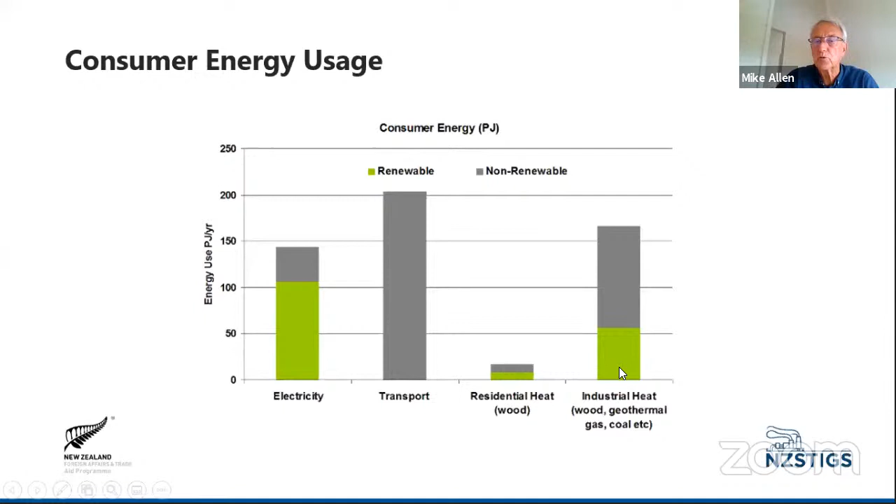Talking a little bit about New Zealand's electricity system, because that sets a picture as to how we choose sources. We're very small in terms of population, around 5 million people. The area of New Zealand is roughly the size of California in the United States. As many of you will know, it's 2 islands separated by the Cook Strait. The generation for New Zealand electricity is spread throughout the country. The predominant generation, by hydroelectricity, is in the south, and it's transmitted by a direct current overhead system and under Cook Strait into the North Island, because this is where the majority of population is. The largest population is in Auckland, the capital in Wellington. So there's an HVDC link between the 2 islands.

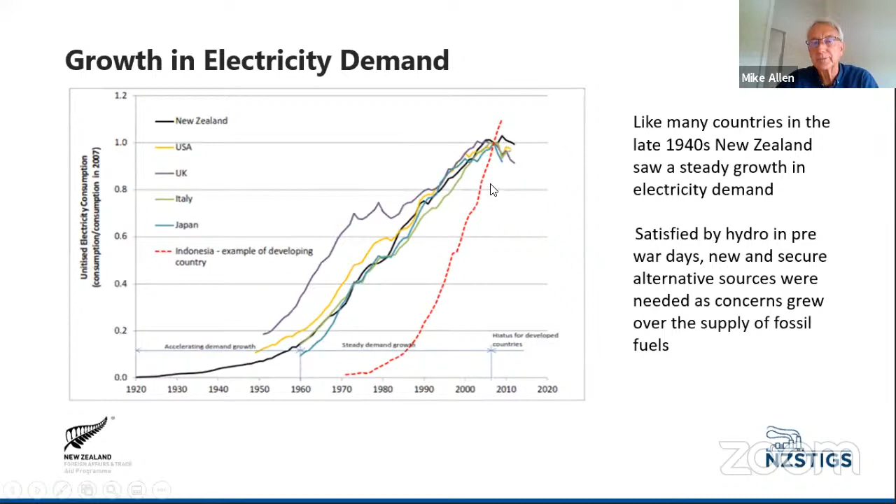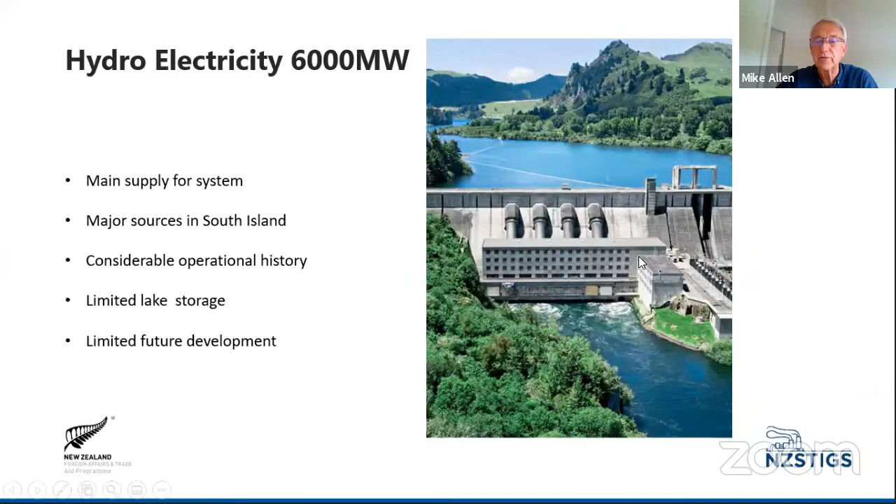New Zealand has a mix of renewables, as I said. The predominant form of generation in New Zealand for electricity is hydroelectric power, so this uses water. In New Zealand, the systems are such that there's not a lot of storage for water. They're not run of river, but there's limited storage, only about 2 weeks capacity if we run out of rain or we run out of snowmelt. But we have a very long history of hydroelectricity being important for us, for over 100 years. The state's first project was built in the 1900s, and by the 1960s, there were major developments in the North Island, and then in the South Island we began to build more hydroelectric plants.

As with many countries, hydroelectricity is environmentally becoming less and less acceptable because it takes a large amount of land. Although there are plans for some small schemes in New Zealand, it's unlikely that we will have major hydroelectric developments in the future.

The one exception is that we are at the moment considering a pumped hydro storage project, where when we have excess renewable energy during the daytime, we could pump hydro and store water for later use. Geothermal, which we can talk about in more detail, is about 1,000 megawatts.

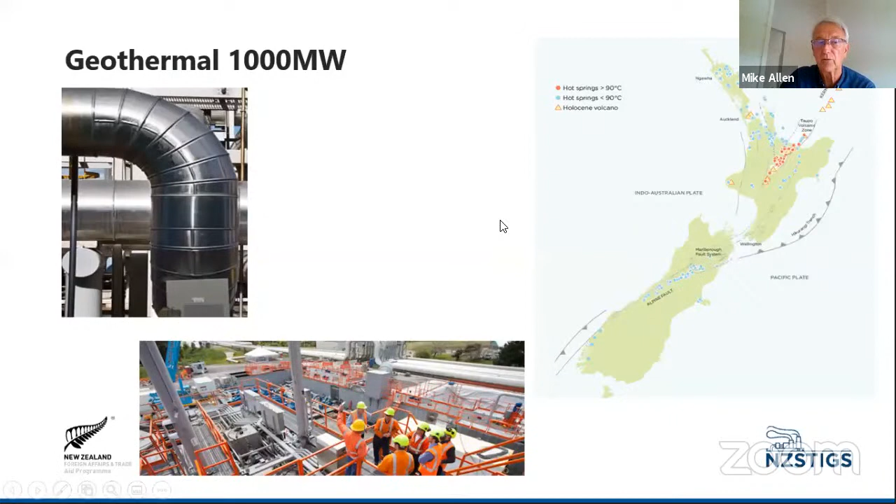So if you look at the history of geothermal in New Zealand, it's been slow and influenced by a number of things.

Post the Second World War in the 1940s, New Zealand as an island nation was looking for security of energy supply. We did not have our own oil and gas, so everything was imported.

It happened that a number of people who were involved in the Second World War from New Zealand saw what had been done in Italy, where the Italians had developed geothermal energy for their use. Having seen that, and being aware of the geothermal resources in New Zealand, they came back and encouraged the government to explore what could be done with geothermal in New Zealand.

So in the 1960s, the first development was in a place called Wairakei, these are Maori names. Wairakei has now been operating for over 60 years, and this was a state-owned development.

Then there were some smaller developments in 1966, but there was almost a hiatus in geothermal after that. What happened in these years was that New Zealand was exploring for oil and gas, and with foreign partners, we developed a very large natural gas resource off the North Island.

Being a small country, that was done on a take-or-pay basis, so whether we needed the gas or not, we had to pay for it. So the government was inclined to build natural gas power plants, and a lot of natural gas was consumed in these years for power generation.

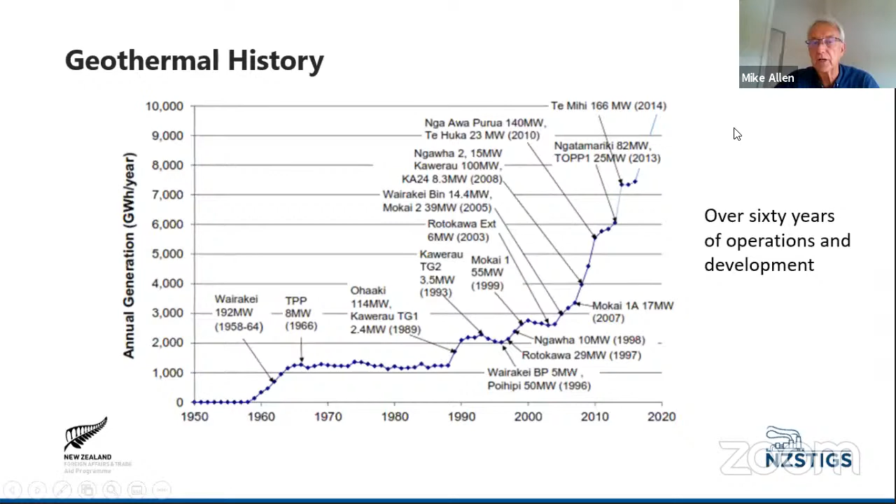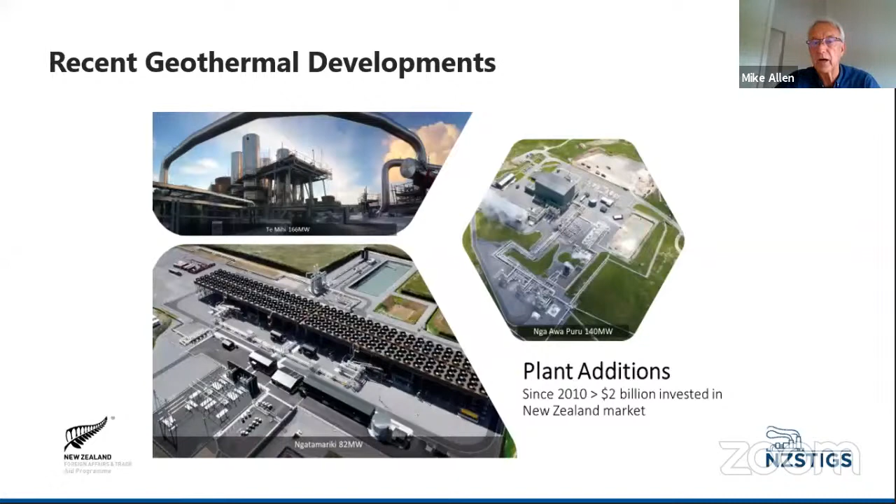In parallel, and I will come back in the Q&A to talk more about geothermal, we've also been looking at other renewable resources.

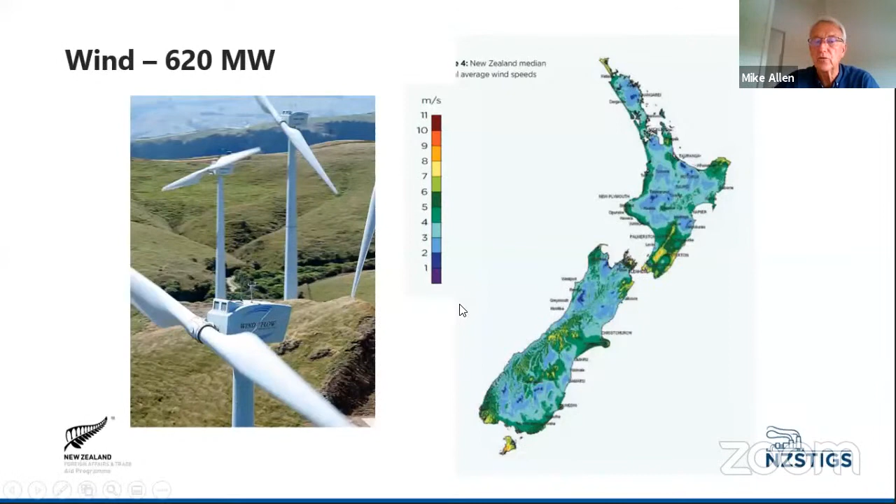As New Zealand sits in the roaring 40s, we have a very good wind resource in general—in the lower central part of the North Island, close to the Cook Strait, and in the south we have very good wind resources, and those are being progressively developed.

This is quite recent, and probably only in the last 10 or 15 years has wind become important to us. At the moment, it's generating about 6 or 7% of our electricity, and there are new plants being built—approximately 2,500 megawatts of new plants being developed in future.

This is a new one, Turitea, which is a nearly 300 megawatt plant in the southern part of the North Island.

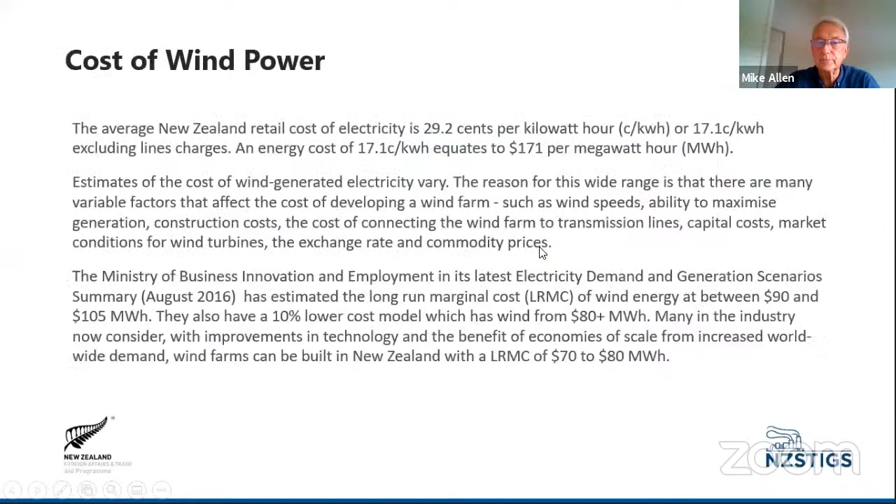Solar electricity for New Zealand is not particularly common. And that's been partly historic in that the hydroelectricity and the geothermal were cost competitive. And until recently, solar electricity has not been particularly cost competitive for grid connected power. So we've tended to stay away from it, but that's changing a little bit.

There are some large scale industrial installations, and this is as industries look at climate change, some of the corporate image, and also the fact that many buildings can be used for solar power without taking up valuable land. There is a growing interest from a residential point of view to use solar PV, but that is as much an opportunity for battery storage and playing in the market in terms of time of use.

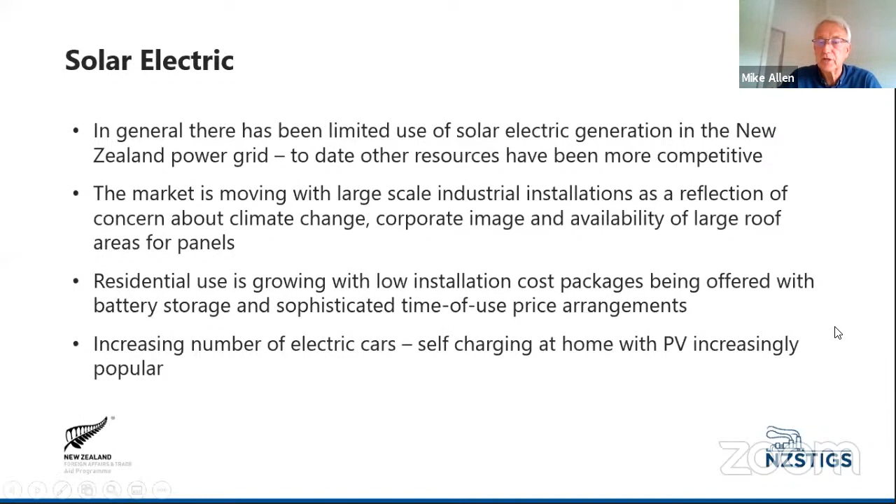So if you have a battery which you can charge with solar during the day, use it at night, you can charge at night and off-peak electricity rates, cheaper electricity if you have storage. So it's a combination of solar development and also more efficient use of electricity. And we are pushing quite hard to introduce electric cars in New Zealand, and that's creating an interest amongst residential owners to have solar PV at their home, which they can use for charging vehicles.

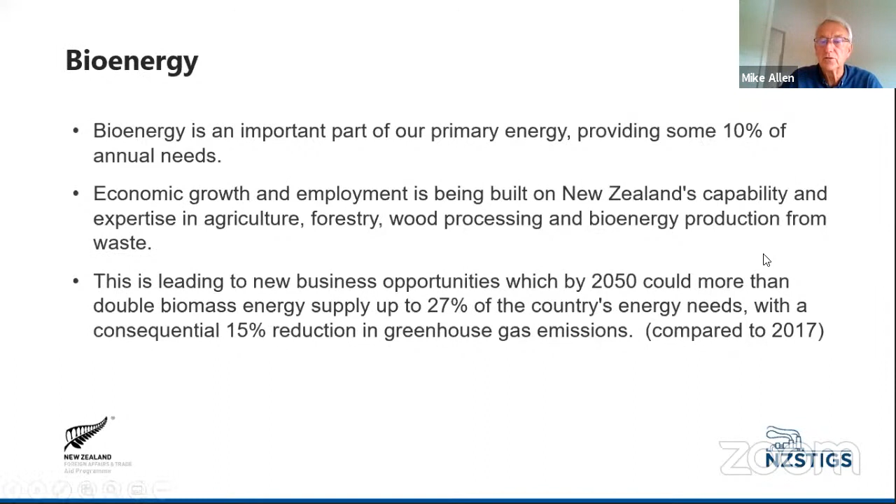Bioenergy in New Zealand is part of our primary energy. It gives us about 10% of our energy. And as we've been building our agriculture and forestry and wood processing work, we are looking at ways in which we can improve the use of bioenergy and the use of biofuels. There's obviously competition from other sources of energy in New Zealand, but there is quite a major effort amongst the bioenergy industry to try and promote better use of waste materials for energy going forward.

So just to give you a bit of an idea about the electricity market here, because in Indonesia with the structure with PLN, essentially you have a single off-taker. And so the generation of electricity is all retailed and marketed through PLN, and the arrangements from electricity producers are only with PLN. However, in New Zealand, we have a deregulated market, which means that anybody can generate energy from any form and can sell it into the market. And I'll explain a little bit more about how the market works in a minute.

But the three major companies, Mercury Energy, Genesis, and Meridian, are state-owned enterprises that I mentioned earlier. So they are 51% owned by the government and 49% are traded in the stock market. Contact Energy was 25% of the original state-owned power company, but it was fully privatized, and Trustpower is a more recent player in the market. So there's a spread amongst the four major generators, and then there are smaller generators as well.

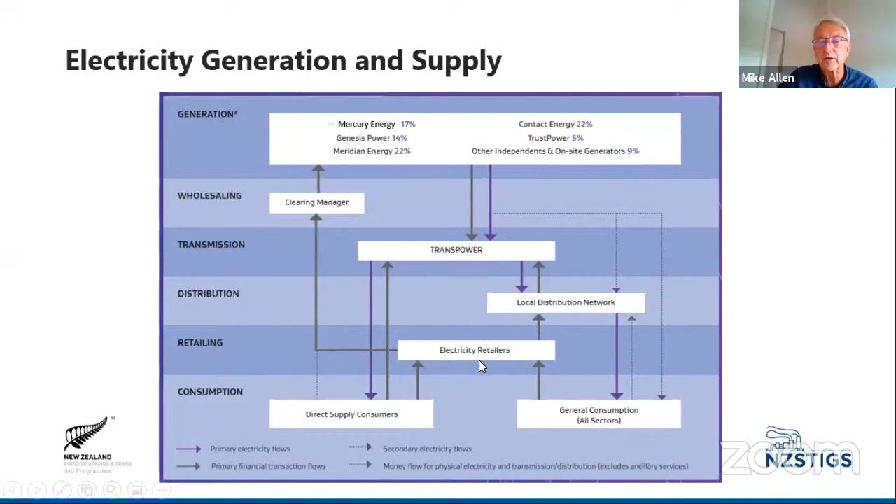Transpower, which is in the center here and is responsible for transmission, is 100% state-owned. And then the local distribution networks and electricity retailers are generally private sector, with the clearing through the wholesale market. So the wholesale market in New Zealand is a little unique. It's imitated in the Philippines. There's a similar one in Singapore, which obviously has a smaller demand. But essentially, it's a bid-based system.

So every half hour, every 30 minutes, the system controller looks for supplies of electricity and where he can purchase them. And in New Zealand, there are about 300 points around the country where electricity can be sold from various generators. And if you could see this, you could see that there are various prices at any one point, any one time. And the price paid for electricity varies through the country. So if there's an excess of hydroelectricity in the south, the price may be very cheap.

It'll be transmitted to the north. If there's a limited amount of hydroelectricity, the power in the south may be more expensive and will be transmitted back to the south. So it's a very important market. It drives opportunities for future development, and it provides a stable source of income.

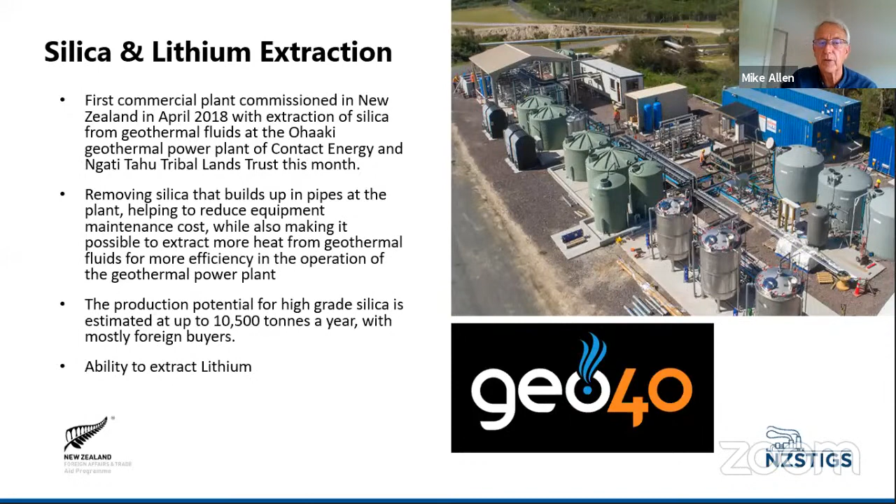But what they're doing is they're actually looking at the extraction of lithium. So it closes the loop a little bit. So geothermal, which is renewable, has waste products which can produce lithium, which then can be used for batteries, which then can be used for electric vehicles. So it's quite a nice circle in New Zealand of what we're being able to do in the future.

One of the other things that we're doing with our renewable energy is that we're looking at how we can potentially use hydrogen. Given that the cost of electricity is reasonable and is available throughout New Zealand, some people would challenge as to why we would consider hydrogen, but there are some very good reasons to look at hydrogen, because for us, using renewable energy and the opportunity to use electrolysis to produce hydrogen, we can basically have a carbon-free green hydrogen. And this is obviously of interest to our economy.

And we've been focusing on looking to see if it can be used in the trucks, buses and ferries, the larger power consumers. And obviously hydrogen is used in vehicles with fuel cells, and fuel cells after the combustion of hydrogen only emit water, so there's no carbon dioxide, so they're carbon neutral, which is very important.

We're starting to develop our own domestic hydrogen supplies and looking at the potential export of hydrogen. So there are some joint ventures here in New Zealand. One is with the Maori Trust, the Tuaropaki Trust, and Obayashi, and they'll start production late next year using geothermal electricity from there. The Tuaropaki has its own generation facility, and the potential that the gas can be exported to Japan in future.

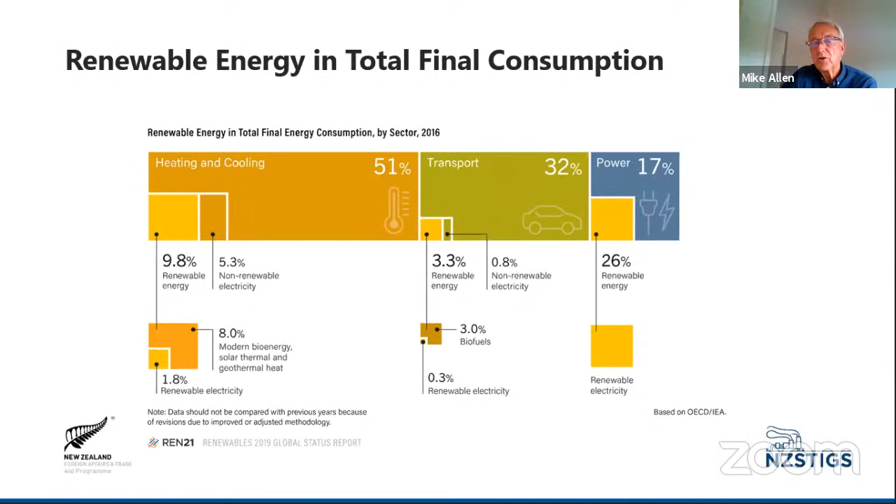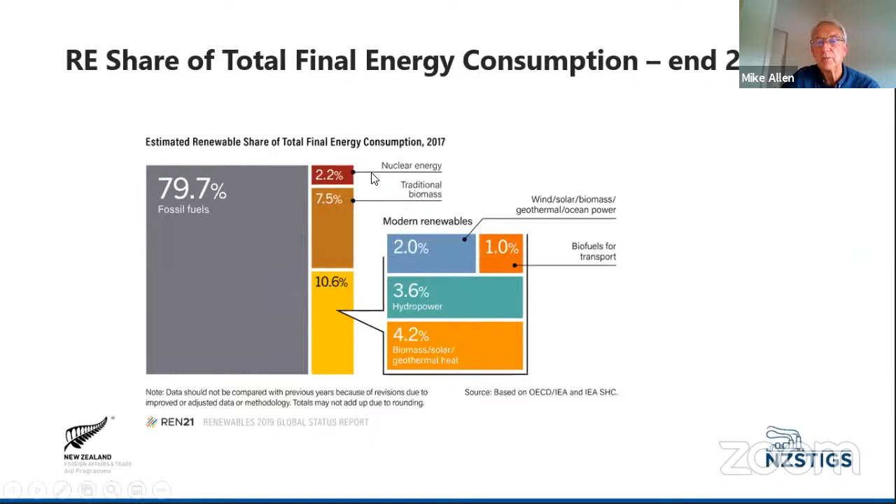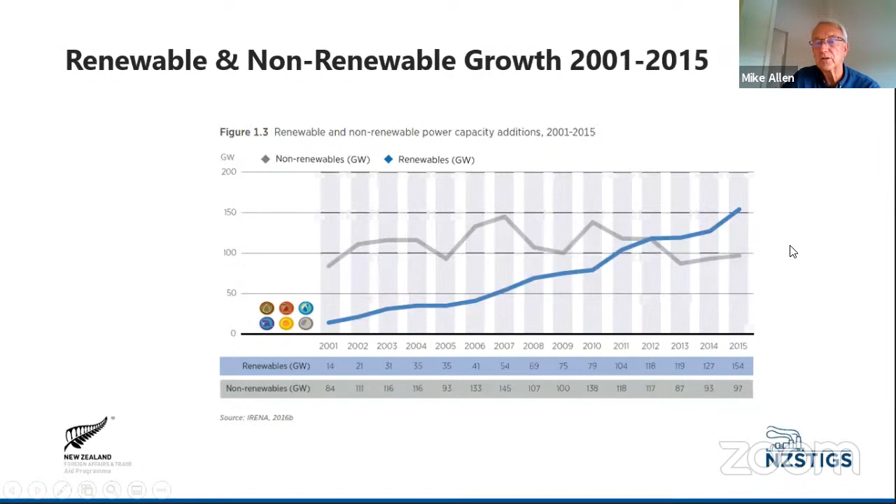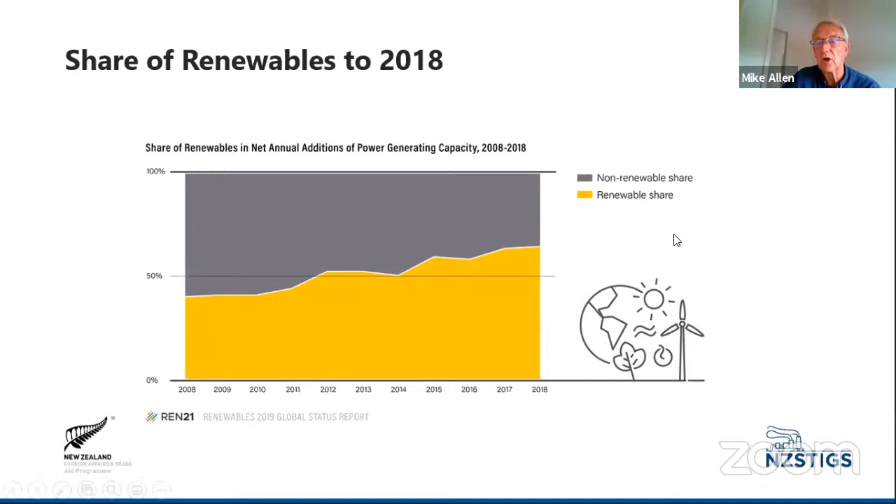They look at the global activities of where renewables are, what's happening in the final mix, and you can see how renewables are still quite a small portion of the total energy market internationally, but that's growing quite dramatically. And one of the interesting things is that in the last few years, if you look at the grey line, this is the installation of traditional non-renewable energy resources, particularly for electric power generation in the world. And you see in about 2012 that the renewable installations start to exceed the more traditional orthodox. So renewables is very strong internationally, particularly in the wind and solar industries. And in 2018, you can see that renewables are more than half of the installed capacity of new additions going in globally each year.

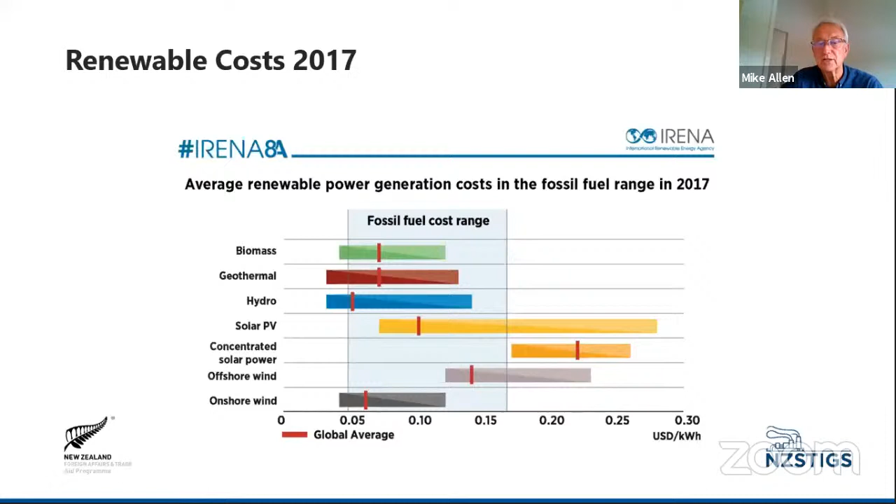And why is this happening? Well, if you look at the table here, you can see that if you look at the fossil fuel cost range here in the shaded blue area, the renewables of biomass, geothermal, hydro, solar, wind in particular, and onshore wind more so, are all beginning to compete price-wise. So historically, renewables was rejected as expensive. This is now not the case, and so there's a benefit there for everybody to be able to use renewables.

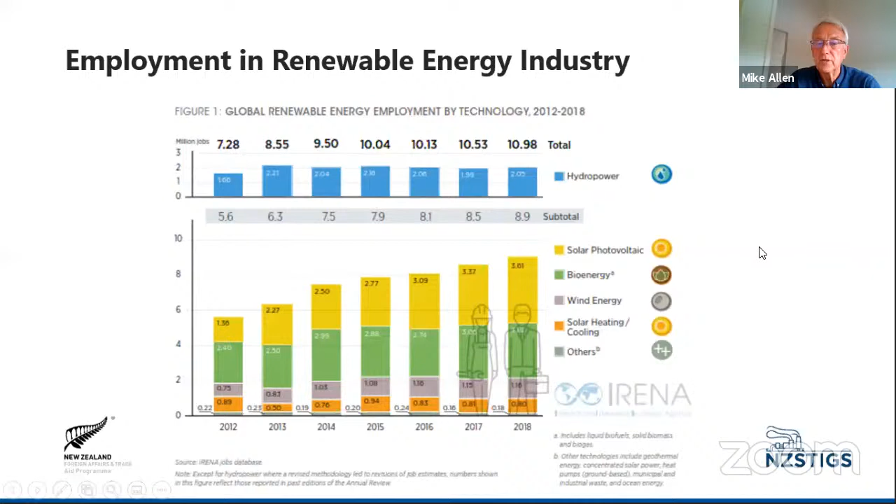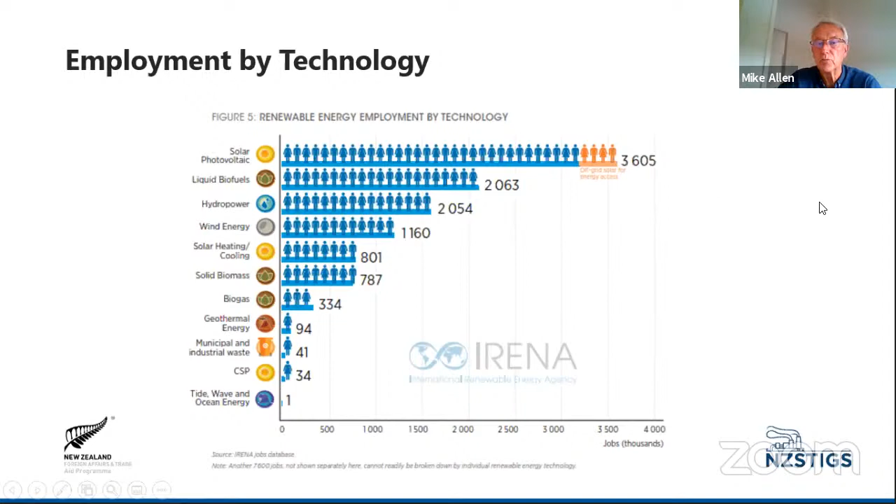Finally, because all of you are young and are looking for future opportunities, obviously your focus is on the energy market. It's on the oil and gas industry, but I thought you might be interested to see what's happening globally in terms of opportunities in renewables. And the renewable industry is growing quite dramatically. I think the figures at the moment are there are about 11 million people employed in the renewable energy industry, and that's growing dramatically. As you can see at the top here, solar photovoltaics take up a large portion of that employment, but there's a whole range of employment opportunities through all of the renewable industries. And I'd encourage you to look more broadly at where you might have interests.